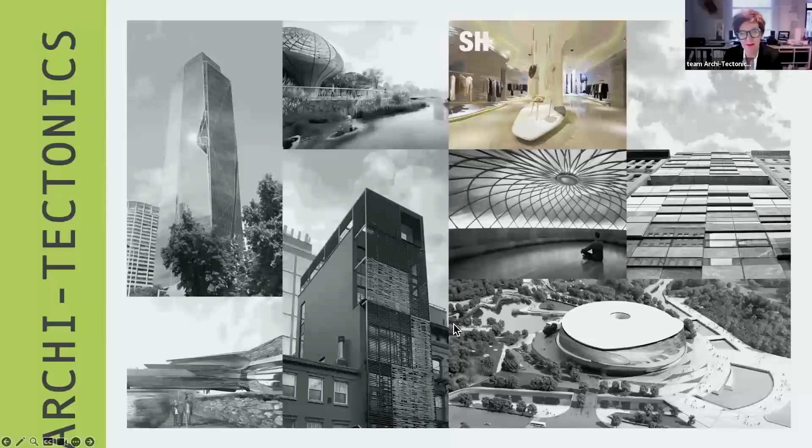So yeah, here I am representing my office, Archi-Tectonics New York, with offices in Hangzhou, China, and Amsterdam, in the Netherlands. I am from the Netherlands, so if you wonder where the accent is from.

What you see on the screen here is a range of projects, and I'm showing this because what I like personally is, up to 2008, we went smaller project, bigger, bigger, bigger, bigger. And then 2008 happened. You all know what that is. I call it the Ice Age.

What happened is the smaller projects started to take over the bigger projects that were all frozen and on hold, and all kinds of other beautiful stuff canceled. We realized how fun it was actually to calibrate smaller projects in between the bigger ones. A building could take 5 to 10 years, a small project you finish in 3 to 6 months. It's an interesting kind of good-for-your-brain thing.

So in the office, as everyone else probably, we are very focused on the Anthropocene. As I just discussed, we all know construction and households alone are up to 40% of the global carbon footprint. We look at that Anthropocene, and a little bit at monsters and mutants, monsters being hopeful monsters, I'll explain that in a minute, and how architecture can hybridize and become closer to a synthetic nature.

We underestimate our direct relationship as humans to the forest. I say forest and not tree, because we need the local biome of a forest. Forests are compilations of plants and fungi and mushrooms and insects and birds, the whole microcosm of that, or the microecology of it.

It became very apparent when I took my students last year to Denmark, Denmark being so ecological or ecologically aware, and came to this island, Læsø, in the north of Denmark, where already in 1600 people had run out of trees.

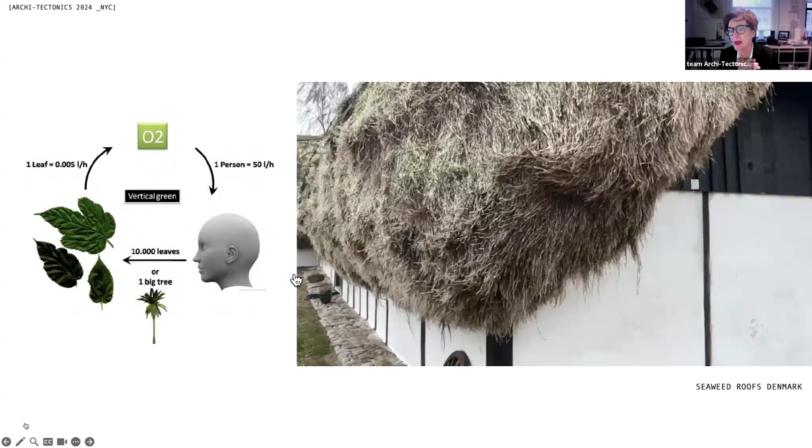They had used it for heating, for building, for everything, and no more trees. So the only time they could build something was when they had a shipwreck. And then, of course, what do you do with the roof? They put seaweed on it. It starts with about 7 feet of seaweed in the initial phase to get it watertight and insulated. These roofs, over 300 years, have reduced to about a foot thick and are resistant to fungi and molds, very insulated, and quite resistant to weather. That's the good news. The bad news was the running out of wood.

As we all know, the other problem we have is that we need to keep our soils and water healthy and alive, literally, and that takes a very balanced approach.

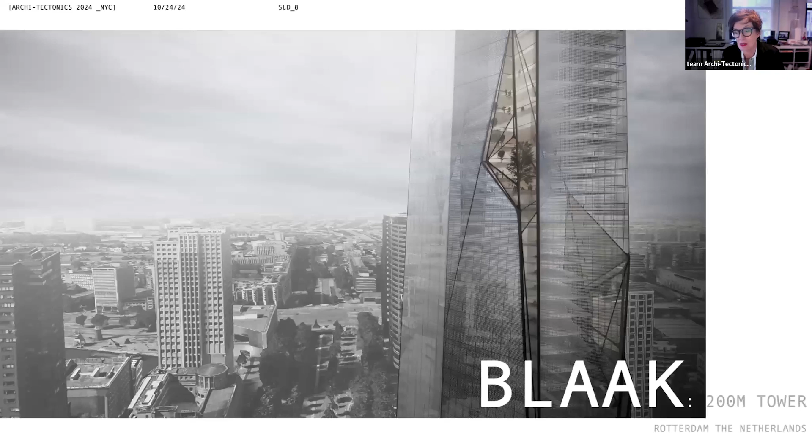One tower we're working on currently in Rotterdam deals with that in the sense that we pull the public spaces up from the ground floor of the city, and the tower in the higher areas has sky lobbies that not only become the green lungs for the spaces, but also become public spaces, such as a library, gymnasium, and a restaurant.

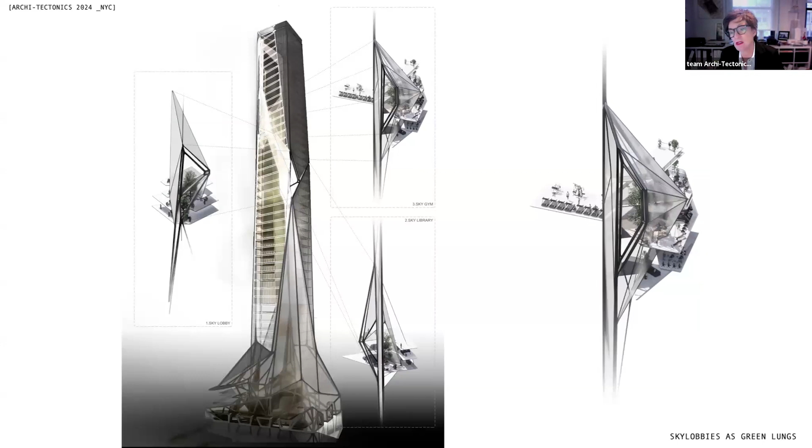These green lungs function because the tower itself acts as a solar chimney, which means at night cool air is pulled up in the tower that pushes the hot air out, chills the plants and the air, and also starts to create different oxygen levels in the building.

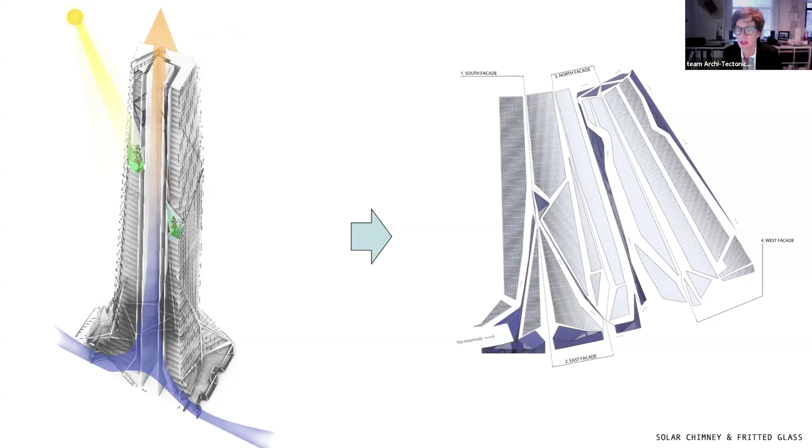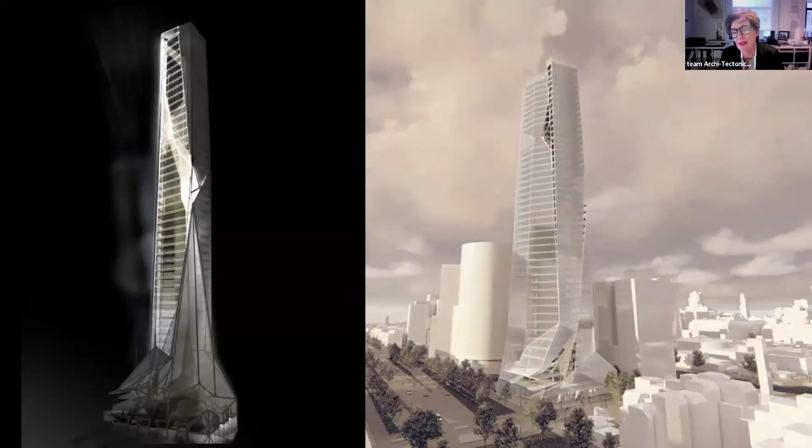Of course, the simple way also is fritting the glass towards the south, with lots of frit, and toward the north, no frit. And then here you see how the tower starts to record its sky lobby or its public space along these transparent lines in the facade as this 200-meter tall tower starts to occupy my city, where I come from.

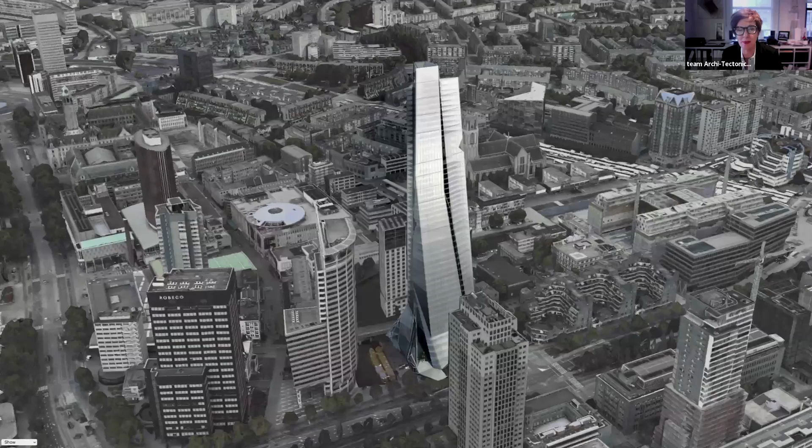These are the sky lobbies as they occupy the spaces and the tower in space. And then one of our first projects was already passive solar.

This started in 1998, and was ultimately completed in the beginning of 2000. Freezing the carbon footprint by keeping the 6-story warehouse in place, wrapping it by an extension that's 3 times bigger, so it sits next to and on top of it, with concrete floors and folded glass.

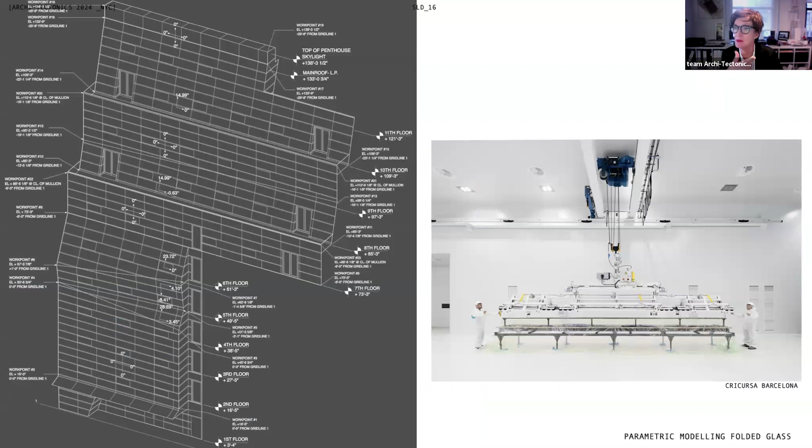It was also one of the first parametric models where we sent the 3D model with XYZ points rather than dimensions to Cricursa in Spain to fold the glass. The glass is literally folded and double glazed, then sent to Hong Kong to extrude the mullions, and then to Brooklyn to unitize the glass and put it on the building as you see here.

We also separated horizontal and vertical mullions to optimize the glazing and reduce transference from inside to outside. And the bending of the glass also helps create passive solar energy. I lived in this building and literally never had the radiators on. So it's quite amazing how that works.

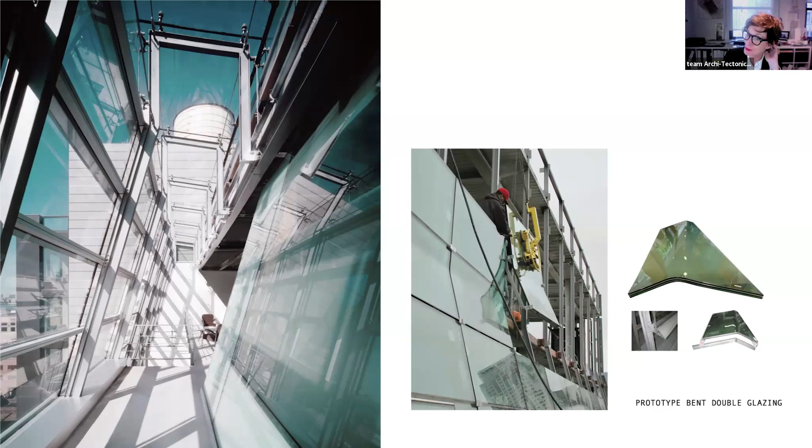Of course, what you don't see here is that the facades that don't have west light are all double concrete with waterproofing and insulation inside. So the building is actually an incredibly heavy building. Beautiful is always this sort of inflection of old and new on top of each other with a little water tower here. And then how that works inside.

The next one is a building in Tribeca where we started to think of the facade more as a calibration of private, non-private, visual, non-visual, transparent, non-transparent, understanding the apartments like sweaters.

So you could buy one with a balcony in the north or the south, or 2 floors or 3 floors. Every apartment was different. What is the beauty, of course, of digital design, is that you don't have to really worry about repetition while still being extremely efficient in the way you build the buildings.

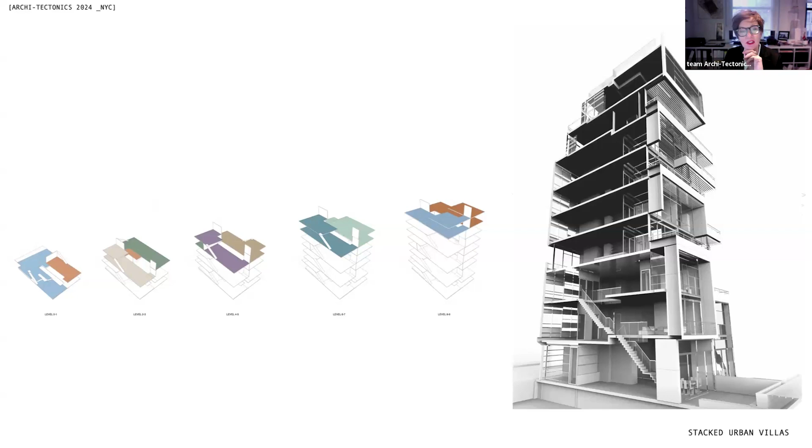Also, a reduction of walls rather than walls. We used floor level changes to create privacy. And of course, we prototyped this facade in Italy, funny enough, because the stone—it's a landmark building.

The stone originally used in Tribeca is a gray marble that is found mostly in Portugal. Then that was laminated ultra thin, so we used very little stone on glass.

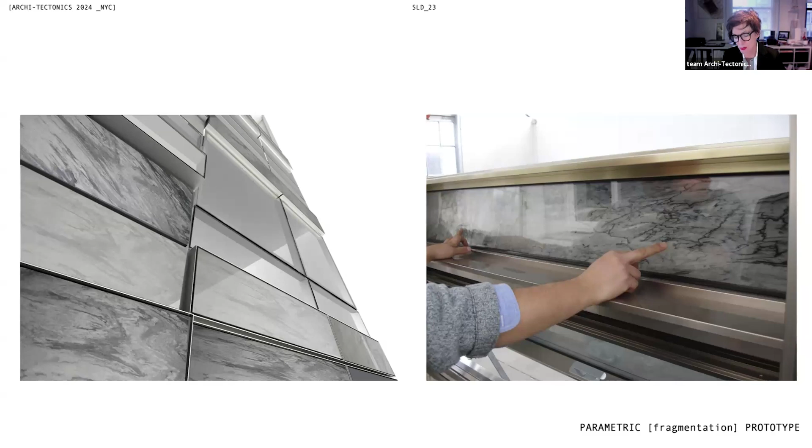And what my manufacturer is pointing at here is which areas are most translucent. It's quite a mystery—it was a mystery then and now—how you choose from a 7-foot high block what it looks like. The guys walked around with a little spray can, put some water on it, and said, that's the color. At which point I asked for a hose, but they didn't have that.

And then here, how it works on the inside. So the calibration of these stone, translucent glass surfaces really also calibrates the space.

This is, for example, a bedroom where we made it quite opaque. It runs then into a bathroom where the walls are made from the same stone, the gray marble. So you get a nice continuity.

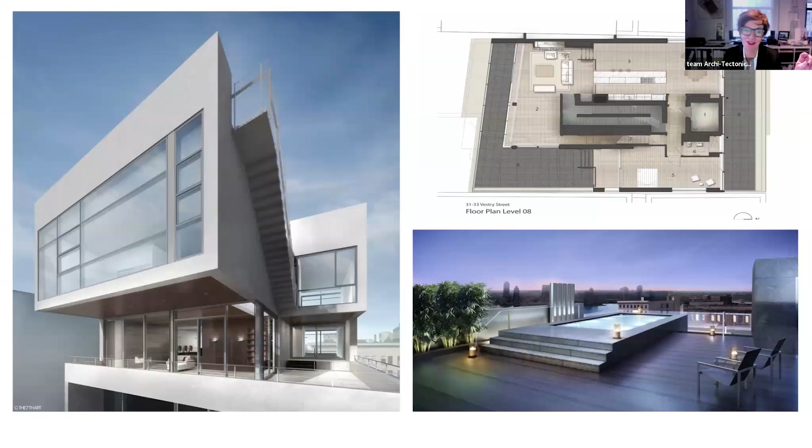Pixelation, very simple, done by hanging it from the main frame and mullions from Schüco. It's very nice how the top is actually this duplex, which really looks like a freestanding house, but is, you know, the top of the building.

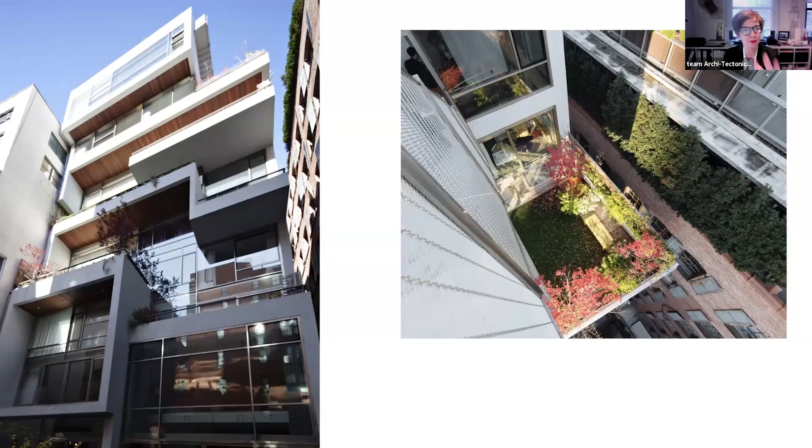And the back, where you start to see this variation, where you really can't see which apartment is what. The bottom are actually triplexes, then a bunch of full floors and a duplex, and how it fits in the neighborhood. So rather than fitting or matching a landmark building, we said we would stick to the quality of the materials in the landmark district, the proportional systems, and go from there.

A very recent one is also freezing the carbon footprint of the 4-story tiny townhouse. Client wanted to add 4 floors, and then we realized A and B doesn't make C. So C in our case became a 3rd addition, which was the climate skin that we made 3-dimensional, wraps in the front, over, and in the back. And wraps not only the building, but also exterior spaces.

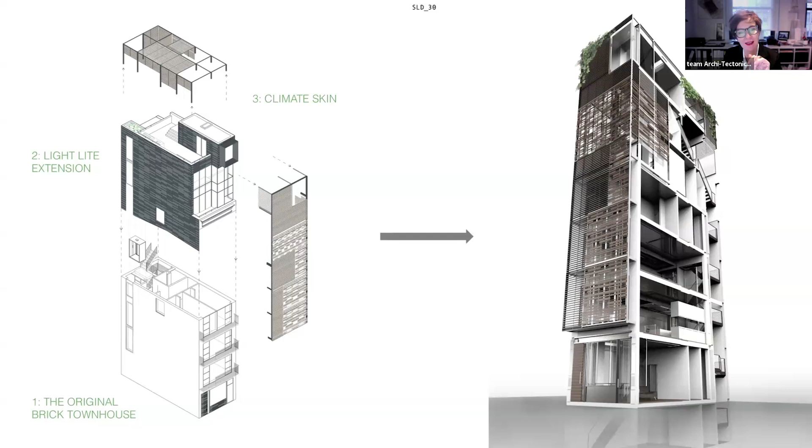We have small balconies in the front that were the leftover landings of the fire stairs that we took off. It wraps over the roof terrace with green roofs and some vegetables, actually. And then on the back, on the skylight, this is a 3-side enclosed building. So quite a small amount of glass. So we really celebrated all the outdoor spaces.

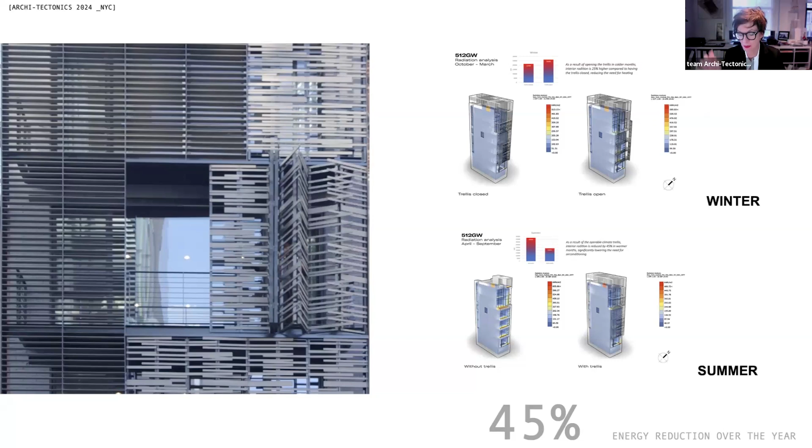And here you see us test the facade. When it opens, it actually veers out like a bird wing. But when it closes, it becomes flat, as you can see here. So the facade, as it opens and closes, it transforms. Here you see how it looks when it's open. And the beauty of the climate skin, of course, is if you use this correctly, you open it in the winter and you close it in the summer, you can reduce up to 45% of the annual energy costs.

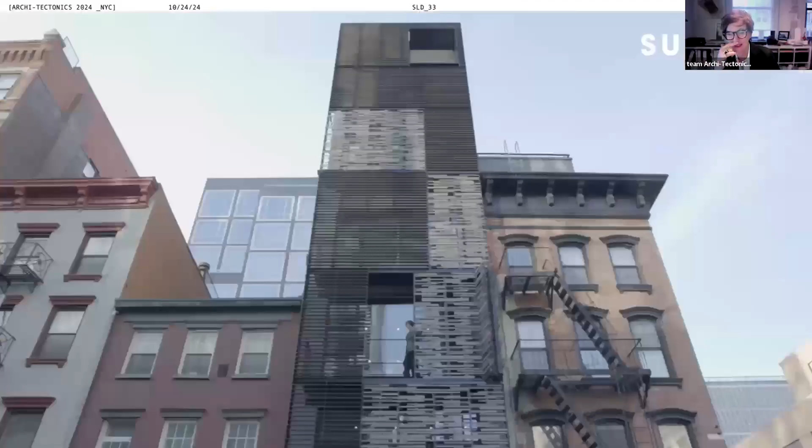Here I am in the extension. The back of the building is stairs and a glass elevator with a skylight above. And then here you see me closing the facade and how it transforms.

Then I jump into a real hybrid, maybe, and a real mutant and monster project. Invited competition. It's a scale jump, I have to say. It's an invited competition from 2018. 5 international offices were asked to look into the Olympics, the Asian Games. The Asian Olympics is called the Asian Games. It was supposed to play in 2022, so 4 years out.

116 acres, 2 million square foot of buildings, and a stipulation, which was quite interesting, of 85% park, although we had 2 million square foot of buildings. So of course, being a responsible architect, I like to build nothing, or less. And I say this not lightly. We like to build very few buildings. In this case it was hard, because there was a very specific program related to a specific event.

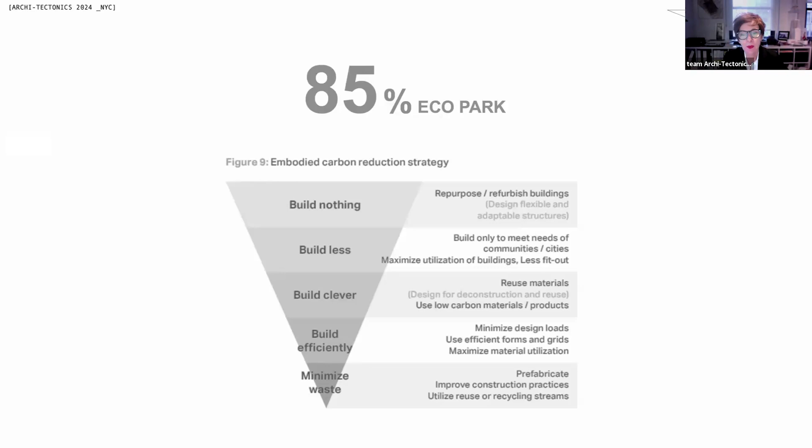So we went for the lower half of build clever, build efficient, and minimize waste. We had some very specific strategies. We used solar energy to create the lighting for the park, to have the park always be lit. A sponge city requirement came from the government that asked us to make the park a sponge city, for absorption of stormwater, filtration, and retaining of the water.

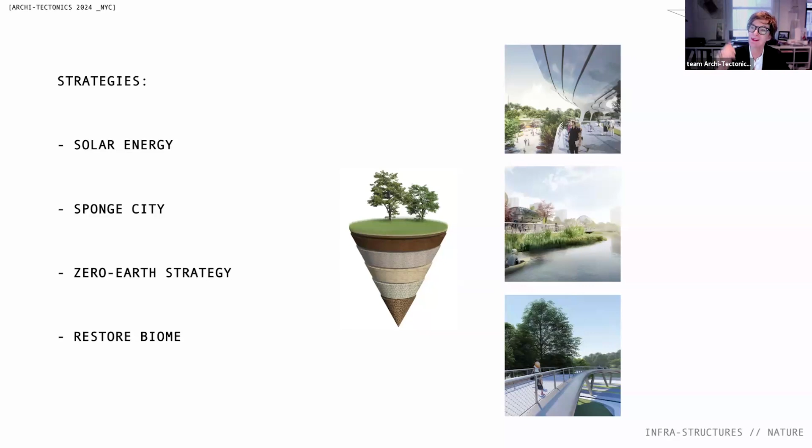Zero earth strategy we added, which meant if you excavate new wetlands and make a connective valley, then you keep the earth on site and you actually create hills, which then absorb sound from the city and restore the local biome. So this goes back to the tree is not a forest kind of story.

Also for us important was, if you do such a big project, it should really be for the city. So we studied from the beginning in the competition who was going to occupy the site and what kind of things are we going to add to the park. So we added playgrounds. Here's an outdoor auditorium.

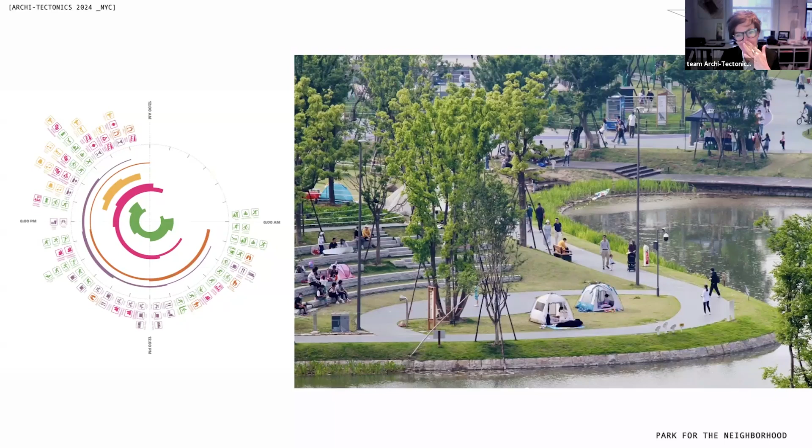People took this literally, so the neighborhood just moved in with tents. This is funny. This was in the Venice Biennale last year, and actually someone thought we photoshopped the tents, which is like really, they thought it was a rendering. I would never photoshop tents in my park, but whatever, it happened.

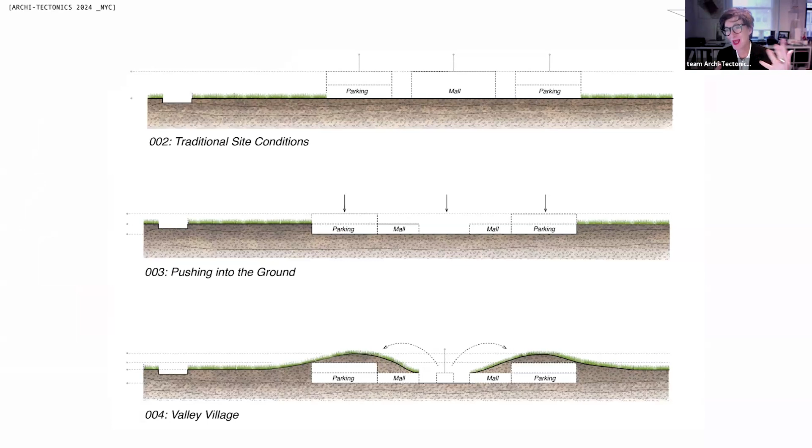The zero earth strategy means you not only keep the biome intact, but you also save a lot of work. So rather than building buildings on top, you lower the buildings only half, and the other half, by excavating the valley that we made to connect the two halves of the park, you put these hills on top of the buildings.

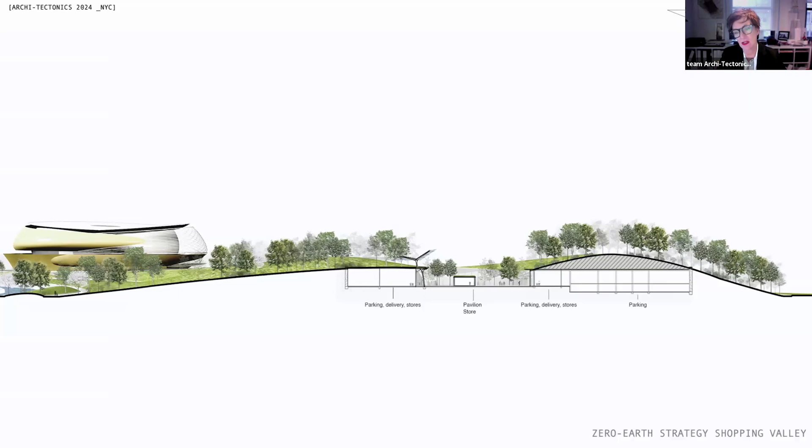This also helps keep the park 85% park. We call these buildings zero-earth buildings, and I'll show one as an example. Here you see how only two buildings are visible, the two stadiums that are hybrids also for the future of the city. You start to see how these hills create an embedding of nature and architecture that is more easygoing and gentle.

And then boom, the result. So about this valley: the park was cut in half by a river and a road, a pretty big road, six lanes I think. In real Dutch thinking, we proposed a valley. The landscape architect was Jerry van Eyck from Melk Landscape Architects. We came on the same idea, let's make a valley under the road instead of an underground shopping mall.

Underground shopping malls are terribly unsustainable, artificial lighting, artificial air, everything artificial, depressing, also bad for our little psyches. We're sensitive enough as it is.

So instead of this underground shopping mall, we proposed a valley with glass pavilions, quite large spaces underground with glass facades, bridges over it, escalators back to the middle sections as shortcuts, little tunnels under the road, and of course lots of plants, sprinklers, and porous pavements.

This is in the valley. It's quite beautiful how you immediately feel like you're in a tiny village. This was my favorite little coffee shop. We designed all the pavilions also. This is very unusual for China. We did a lot of detailing.

On top you see the solar wings with solar film. But the beauty is at night, when everyone stops working, they go down here to have a coffee or dinner, or there's a little comic club, art galleries, shops. It's quite a beautiful little microcosm of things.

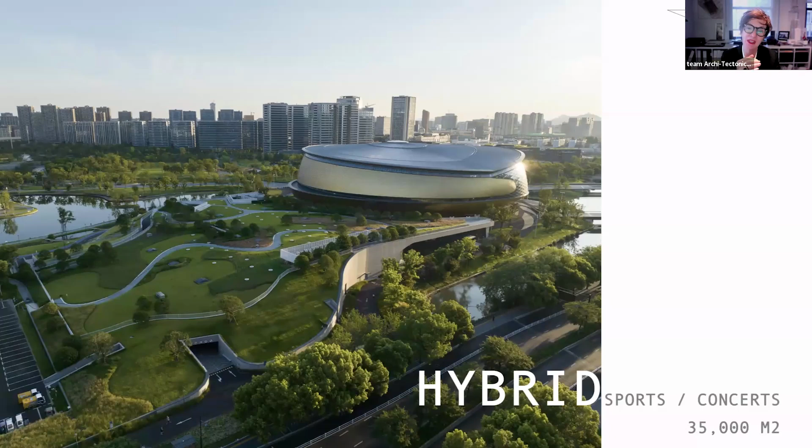As I said, there are two stadiums, I'll give only one example. I don't want to go too long today, but this is one of the stadiums that becomes, after the games, a concert hall. So this is not a neutral building open for all possibilities - it's actually a mutant that will transform after the Asian Games, pre-designed into something that is a concert hall. For us it was important to think, if you do that, what kind of typology do you create? Because if it looks like a stadium, it is a stadium.

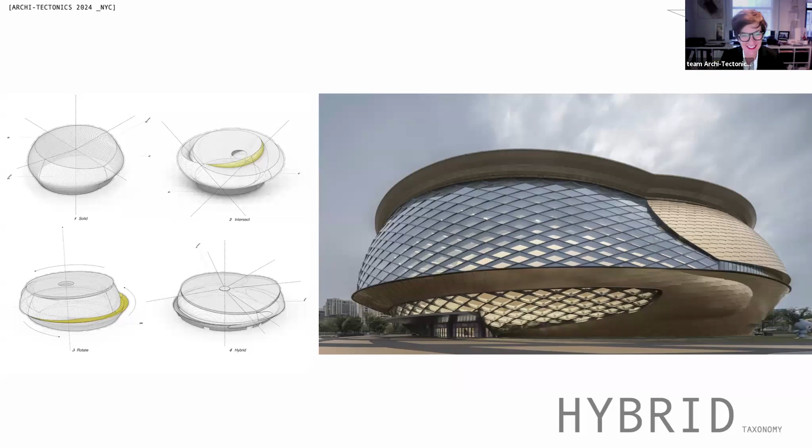They have adopted the alien. Here you start to see these intersections as a steel and glass diagrid, and a brass shingled facade - the brass is a very thin layer on recycled aluminum. Shingles, of course, because it's easy to negotiate the double curved surfaces.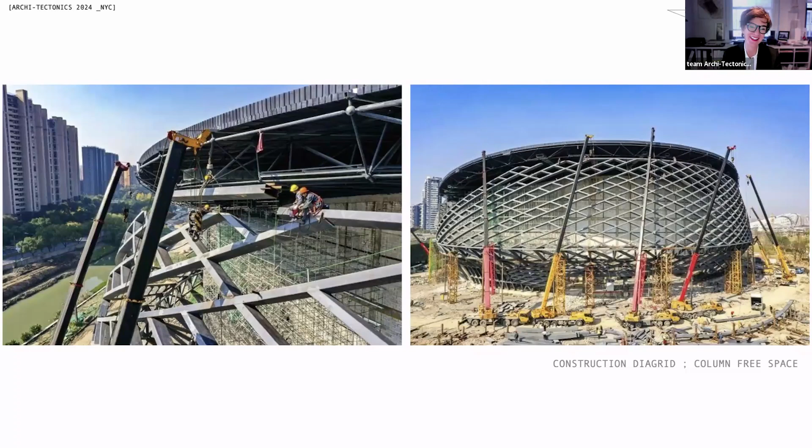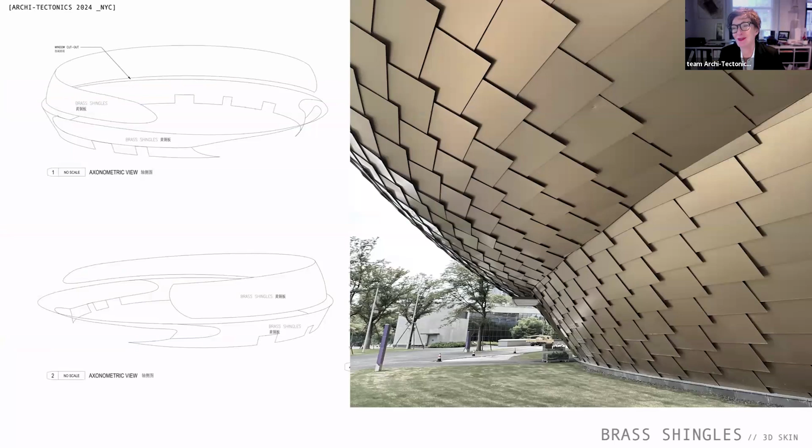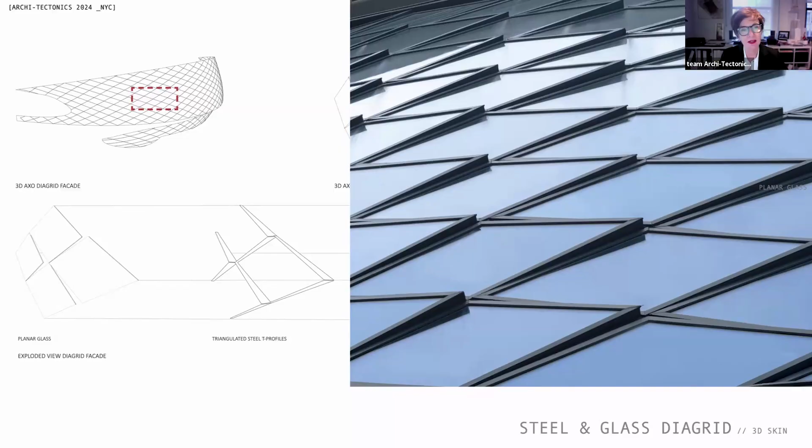These shingles were done by our amazing team in China. They parametrically calculated the 8,000 shingles to have only 85 different shapes. We decided to keep the glass of the diagrid planar to assist in speed and cost control, which means this building is so large that these glass sheets are 5 by 7 meters. It's unreal how big the building is, close to 400,000 square feet. For each glass section, we designed eyelids so the glass stays planar but you get this beautiful 3D facade. The building is so large you hardly see my eyelids, which I was very proud of, but they become smoothed out because of the scale.

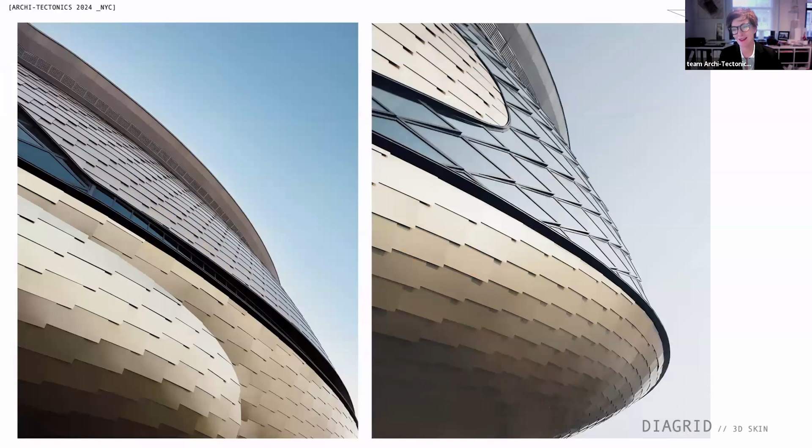Under the roof you see glass windows that automatically open to let the hot air out and the cool air in. This is the mutant aspect of the building, where you start to see these intersections and meetings of surfaces. The inside is all clad in bamboo.

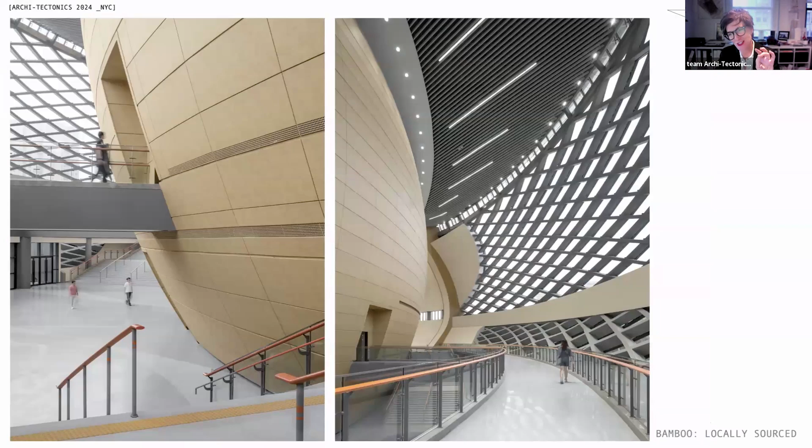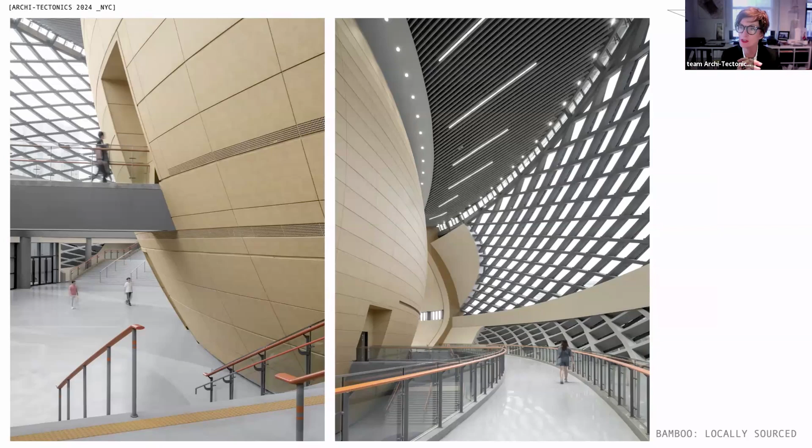I gave Josh this little lecture already, but sorry Josh, I'll do it again. My mission in life is to get people out of wood and into bamboo. Why? Because bamboo absorbs carbon and produces oxygen in 7 years what takes a tree 340. We need trees to breathe, and a tree is not a forest. We need the old forest to stay and keep its biome, because the biggest carbon sinks in our world are the forests and the oceans, and we're depleting them fast. So from now on we can only use bamboo, not wood. Trees stay in the ground and create a little biome. That's my mission in life. So there you have it. Bamboo is also really beautiful, very bendable, very resistant to fungi and molds.

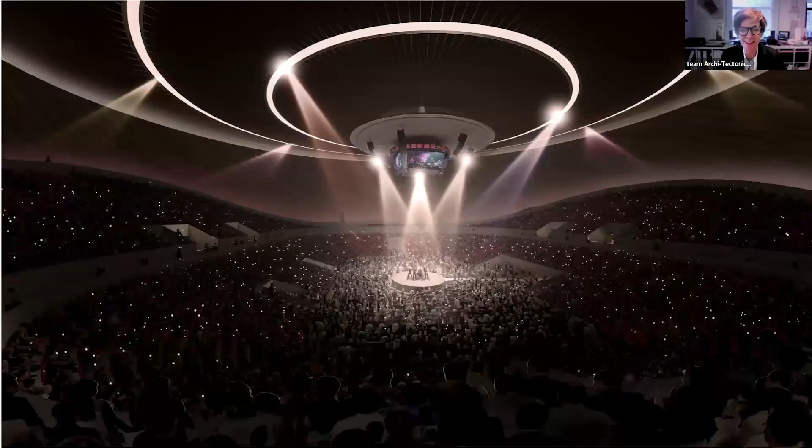But then this is the concert. Already last Christmas, these 6,500 seats were all filled for a very famous Chinese singer. One of the people in my office was actually there by coincidence, and it was amazing to see how easily it transformed into a concert hall. This is how it looks.

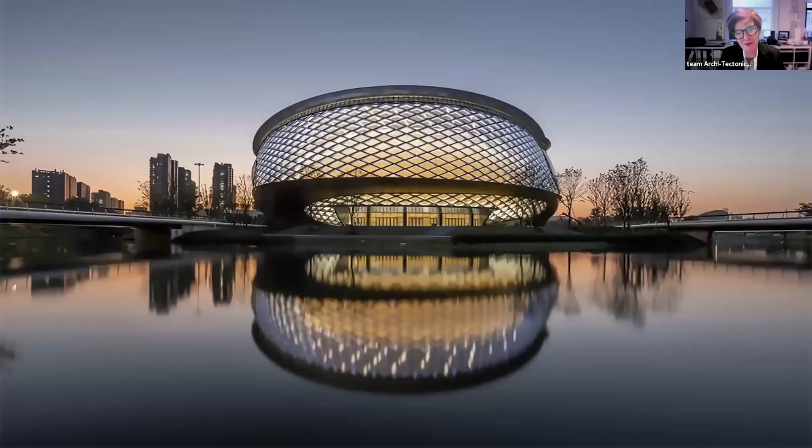The river comes by in the front and then two bridges approach it. Next to it is an earth building. So we have two hybrid buildings, the two stadiums, actually three - the third one is the valley, shopping, and earth buildings.

Now what's quite funny about the earth buildings is that they're earth, as you can see here, but the sprinkles you see on the roof are actually skylights. So even the earth buildings we wanted naturally ventilated and naturally daylit. It's a really weird, really synthetic nature as architecture.

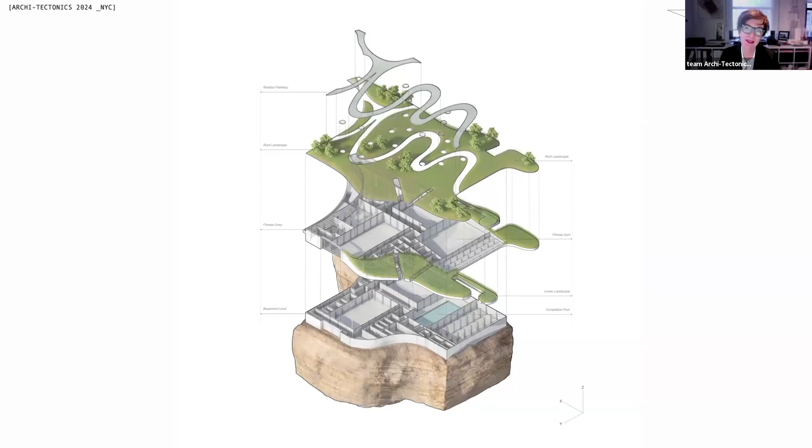The other thing is you see these deep cuts in the building. If it's nature, it has to operate like nature - the valley had to have access for fire trucks, but it's also a building, so it needs egress corridors. This whole building, which is several layers underground with Olympic pools and sport fields and capacity even for conventions, has these egress corridors that become a whole architecture in themselves, really spectacular sculptural spaces, very beautiful. You see some little grass bits at the end there.

But then this is on the roof of the same building. Really lovely is that the locals have taken over the gardening. There is an army of gardeners in orange little outfits, but these people you see here are just people who decided to come and help figure out how to keep this beautiful natural area intact. So although you're on a building here, it's quite natural and quite lovely how it balances out the architecture.

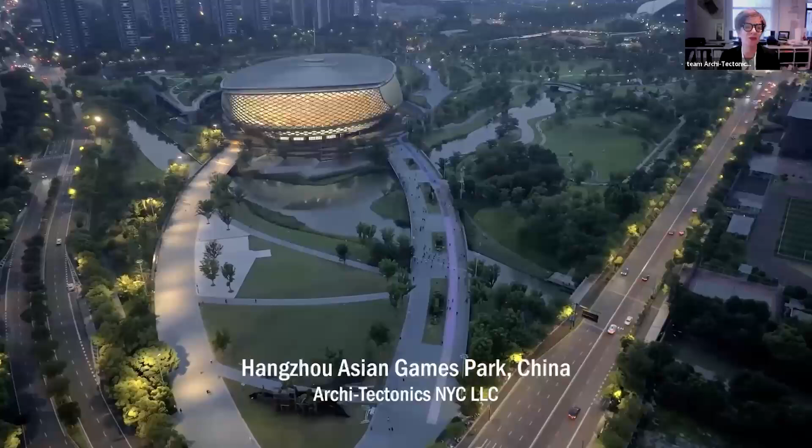And then to end, I give you a little overview of a recent movie. Here on the bridge you see a bunch of people doing some square dancing, which is kind of interesting, and they do Tai Chi and yoga and all kinds of things in the park, and obviously camping a lot.

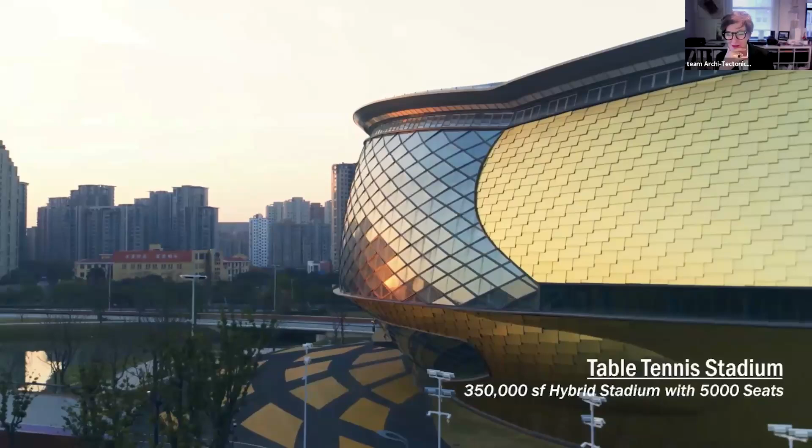So this is in the first building. You'll see the other building. I didn't show you that because it gets too long, but yeah.

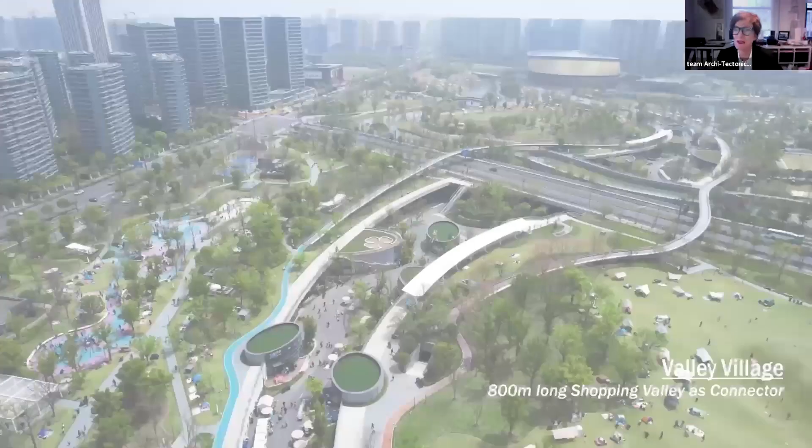So the beauty of the diagrid is, and we introduced a superdome in the building, that the building is completely column free. That means it's highly flexible, easy to adapt to different functions.

There was the playground in pink. This is in the valley. And then you see people running and walking over. There were 8 bridges, viaduct and aqueduct, lots of porous pavement.

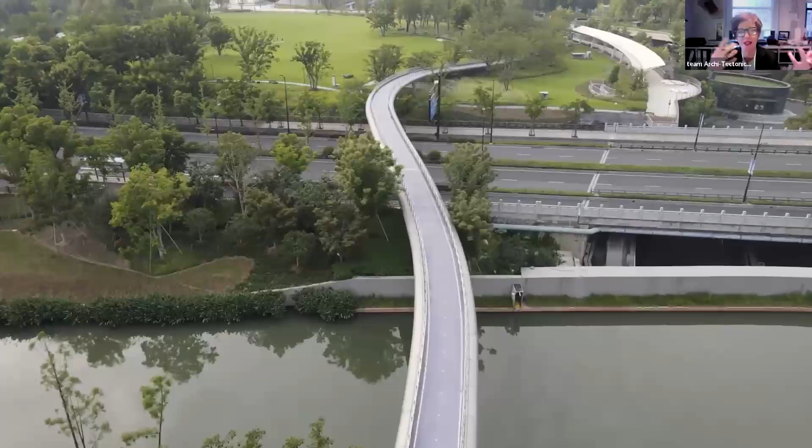So it's also a very infrastructural project, escalators, as you can see here. A lot of shortcuts also to understand it as a very easy and accessible and very porous park to the neighborhood. This is the building.

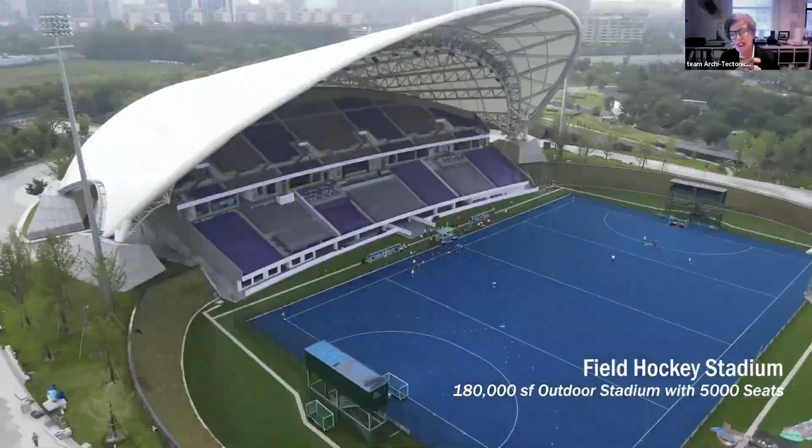There were some people doing Tai Chi. That's the building I didn't show you. This is a 125-meter free-span wing for shading that shades viewers, players, but also the glass facade here at the entrance, where there's a little class getting an instruction on what a sponge city is.

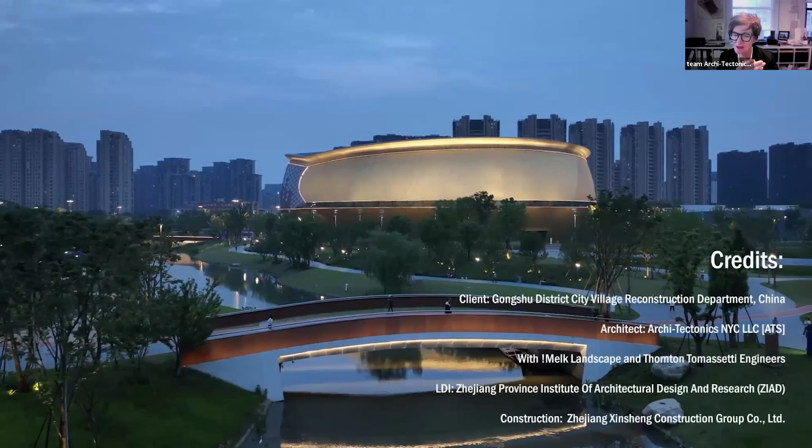And then this is very beautiful at night with all the solar lighting and energy. And then, of course, a massive team. So I already explained it's a massive collaboration between Melk Landscape and Thornton Tomasetti engineers, both structural, facade, and environmental. And of course, an extended Chinese team that were all fully on board with getting this done.

That's it. Thank you. All right, fantastic.

Winka, that's so inspiring. I love seeing the range of that work. So if people have questions, feel free to throw it in the chat. I can allow you to ask yourselves, or I will ask for you. But I can also sort of kick it off a little bit.

Before the session here, we talked a little bit about the difference between trees and a forest. I was in Copenhagen a few weeks ago, and I was remarking about how beautiful and sustainable it seemed, and you were like, well, maybe not so fast. I was wondering if you could recount a little bit of that story you were telling me, and describe what is the difference between something that might seem very natural and what is a better definition of the natural.